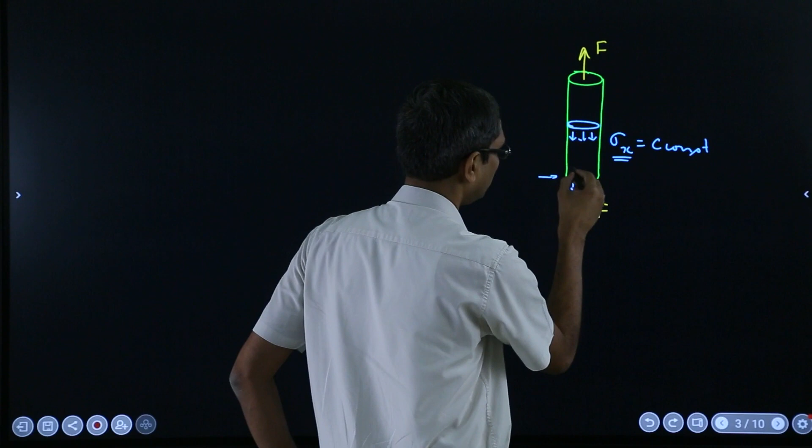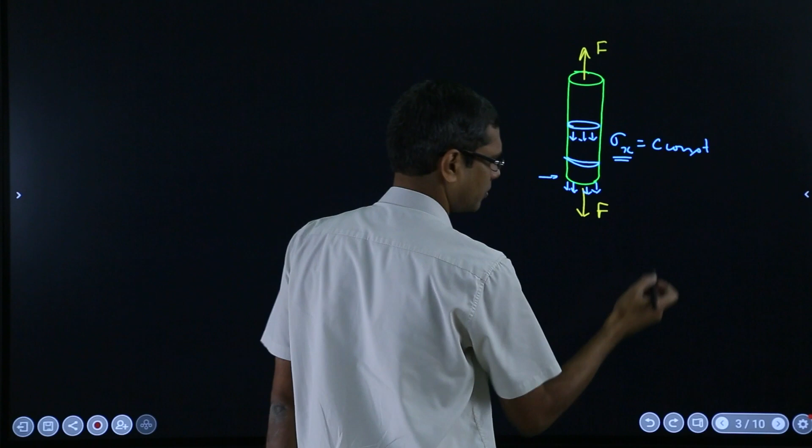So we imposed the condition that F should be applied as uniformly as possible over the cross section, so that we will have this condition as close to the end as possible. Otherwise, if we apply a concentrated force, the stresses will not be uniform here and they will gradually become uniform, and we have to be far away from both the ends to have these conditions of uniformity of the stress.

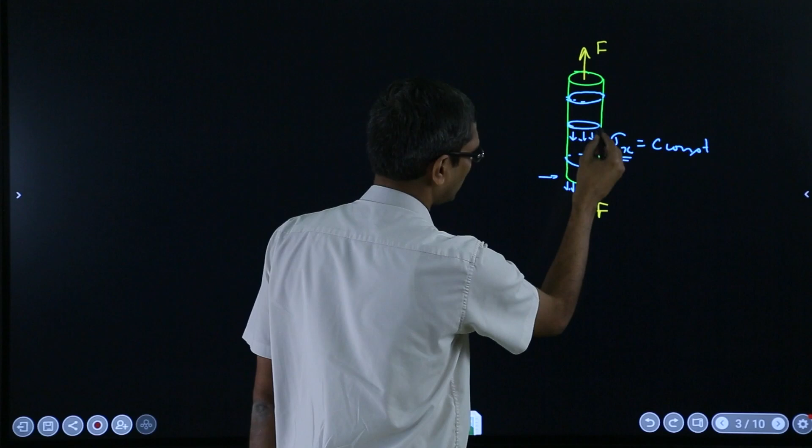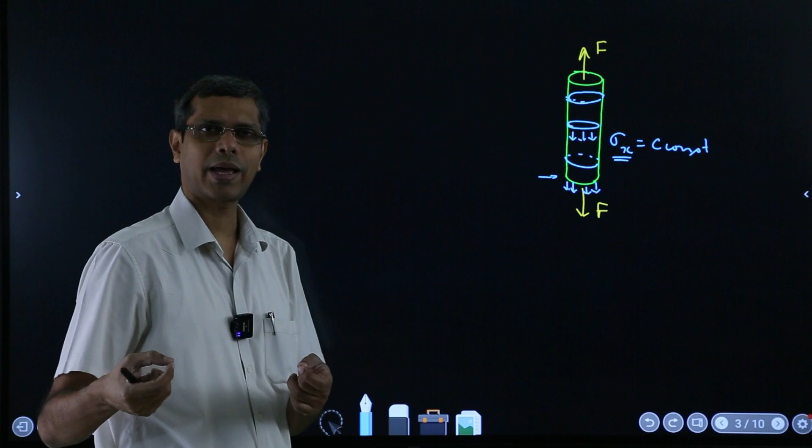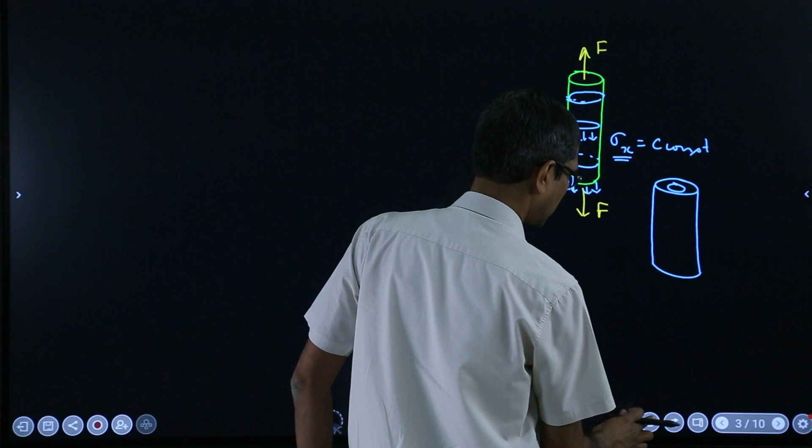And similarly, in the torsion case, we said that the shear stress distribution cannot even be assumed to be uniform, and we figured out that it varies from the center, where it is 0, to the maximum at the circumference. But there one more assumption was that our cross section must be an axisymmetric section, right. So the most general thing will be an annular cylinder.

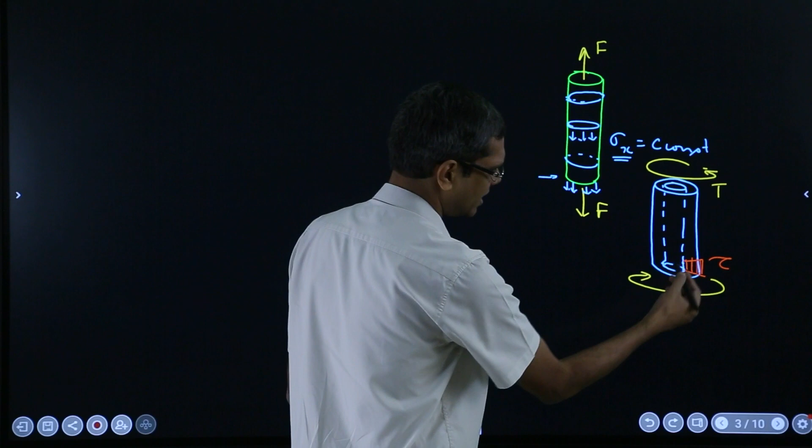So this is what we can get at max, and the torque obviously was acting like that, and the stresses were not uniform, but they were varying over this cross section. So they varied like that, the tau, the shear stress. And here also, if the forces causing this torque were uniformly distributed over all the area of cross section, this linear distribution will happen as close as possible to the ends.

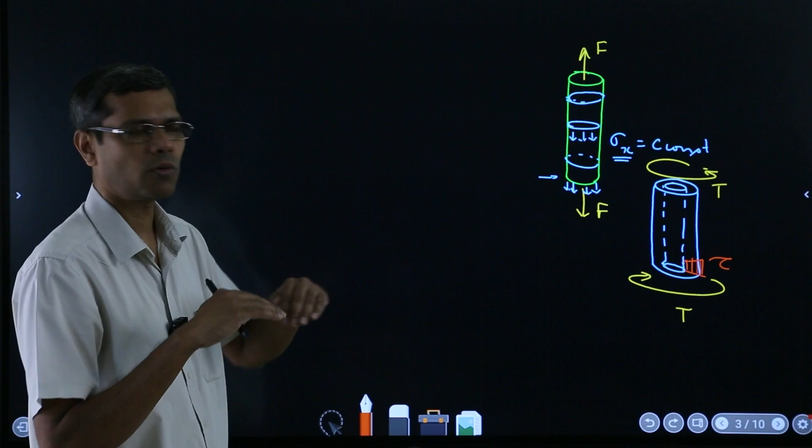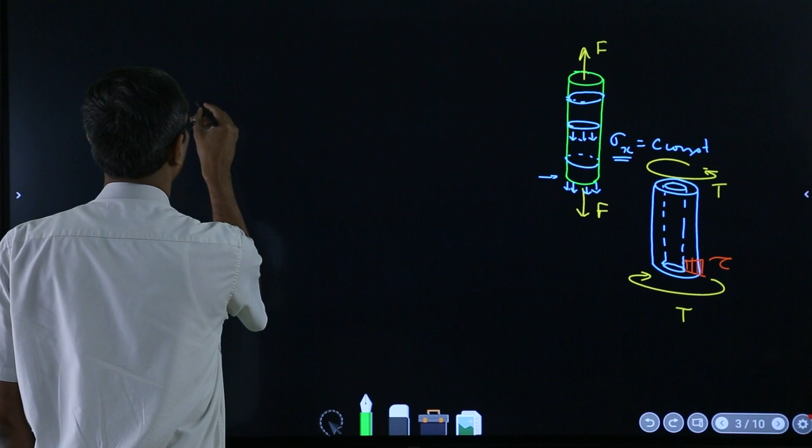So now, in comparison to that, we should discuss the cases for bending, so that it will be clear under what situation, what sort of conditions or assumptions are required to create a pure case of a particular loading. Now, in case of bending, you have the prismatic bar whose area of cross section should have a plane of symmetry like this, suppose.

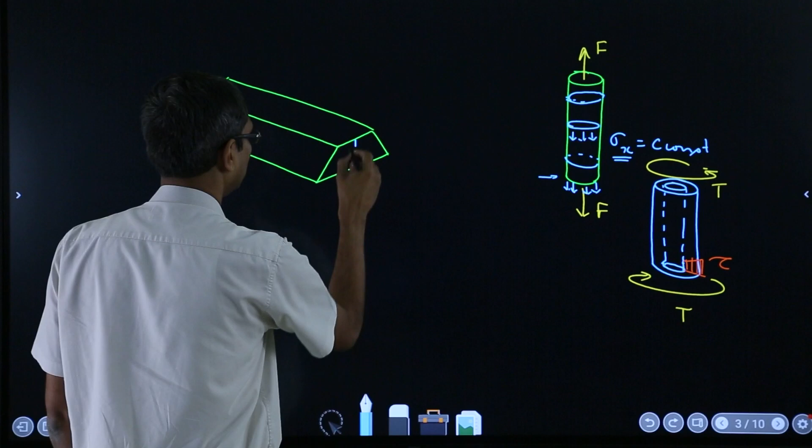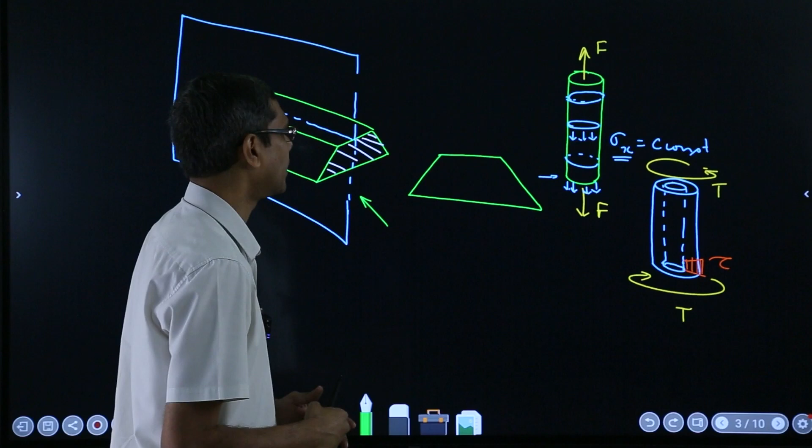And here what I have assumed, which is not very apparent in the drawing, is a plane which crosses this prismatic bar at the center, and this is the cross section of the bar. It's symmetric about this plane. So if I draw this view, it will look something like this. I'm drawing an isosceles trapezium; you can have a rectangle, you can have a square, which are special cases of this isosceles trapezium, and this plane of symmetry is somewhere here.

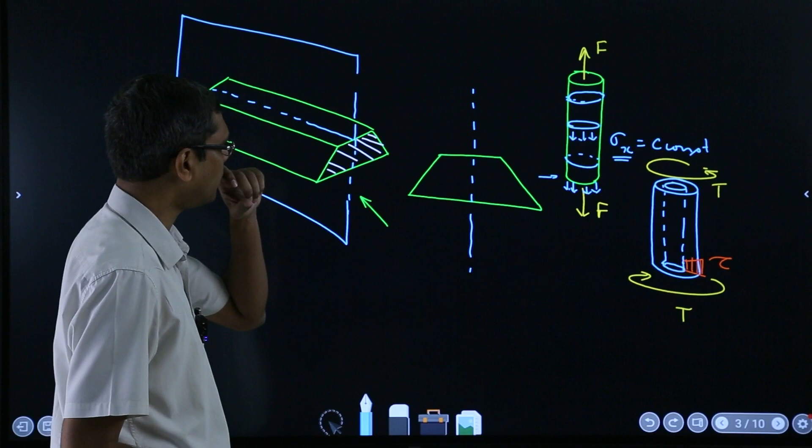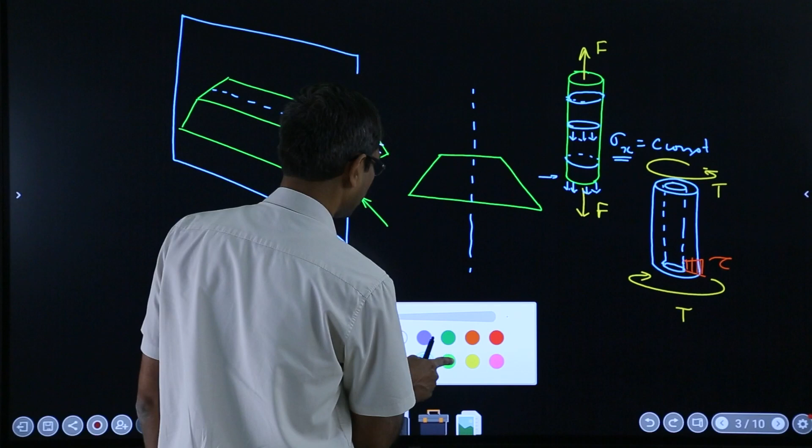So this is the first geometric requirement for a pure bending to prevail in a particular beam. So this was about the geometry. Now what about the loading? When I said that this is the most general, no, it's not the most general. A more general case could be even like this. It could be anything. This is a representative thing. Sorry for using that word. For example, I can choose one which is very common,

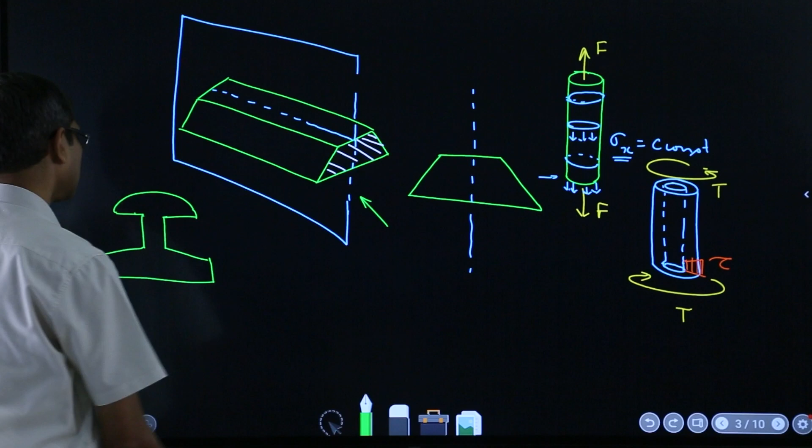like this. Now this is a cross section which has a clear symmetry about this plane. If you extrude this cross section throughout, again this is a case where you expect a pure bending to exist. So when I said that this is the most general, no, it is the easiest shape to draw, where we can show that the section has a symmetry about a plane and which is not a rectangle. Otherwise it can be any general shape.

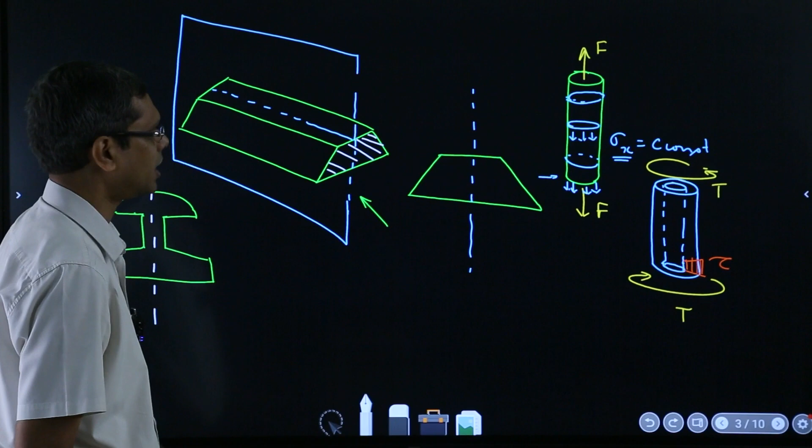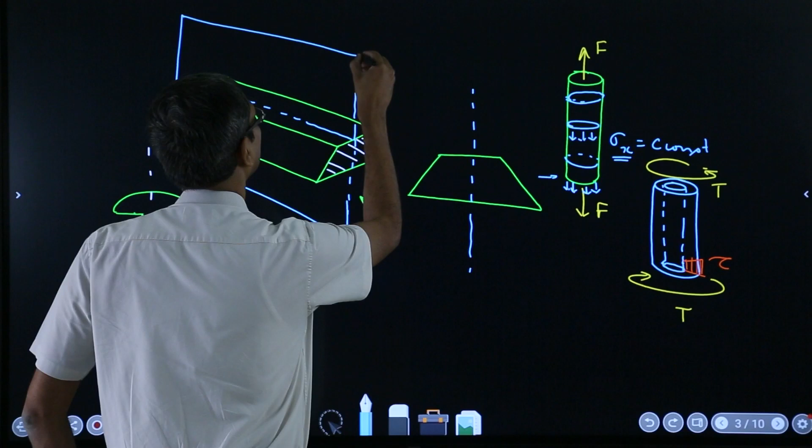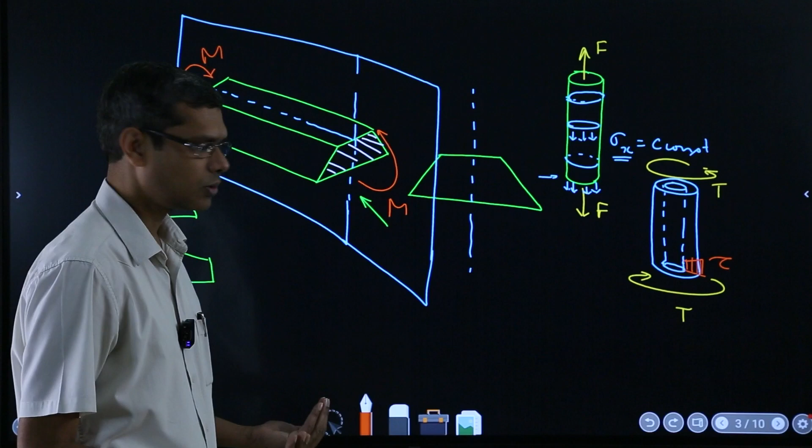And now about the loading, the moment which we are applying on this beam must exist on this plane only. That means I extend this plane, which is anyway an imaginary plane, there is no such physical plane existing, and then I should apply my moment on this plane. So the moments that I am applying exist on this blue colored plane. That's very important, because that means the loading also is symmetric with respect to this cross section.

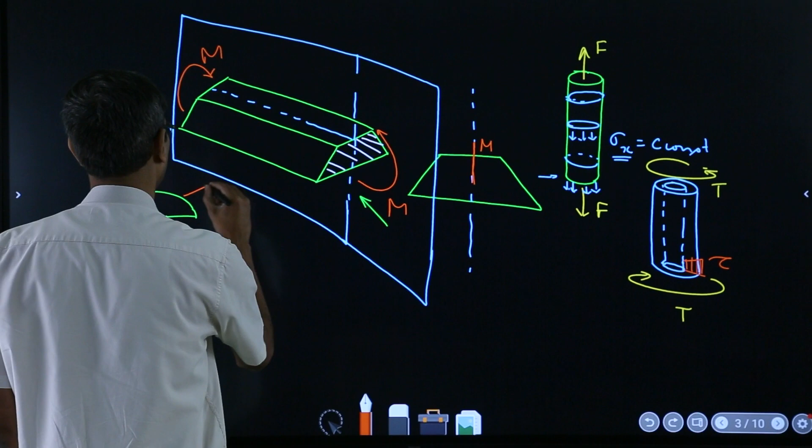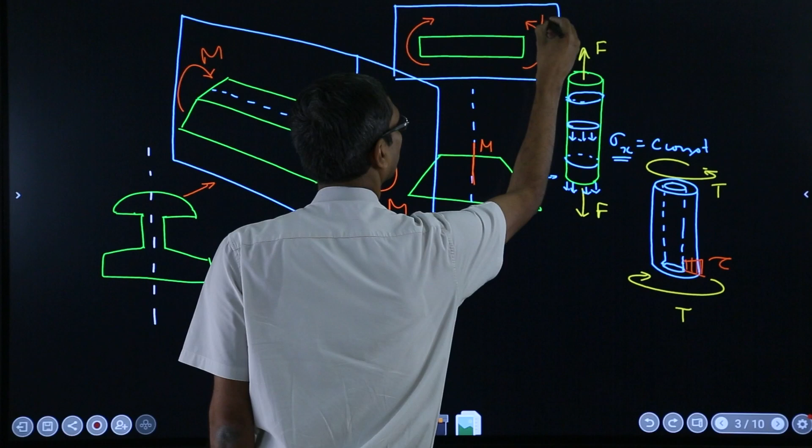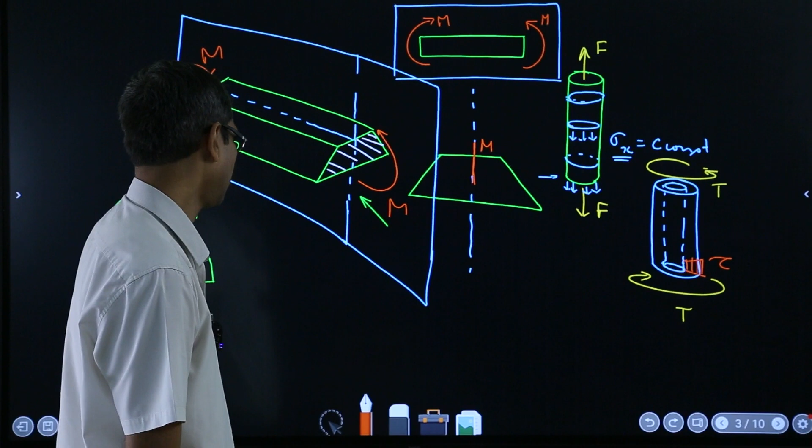That means these M's are acting here, on this plane. And I can draw one more picture looking from this side so that it will be clearer. This is the beam, and I'll draw this blue colored imaginary plane. This is not a physical plane, and the moment exists on this plane. This sense of the moment is conventionally taken to be positive. Now this is the assumption. Any more? I think that should be fine.

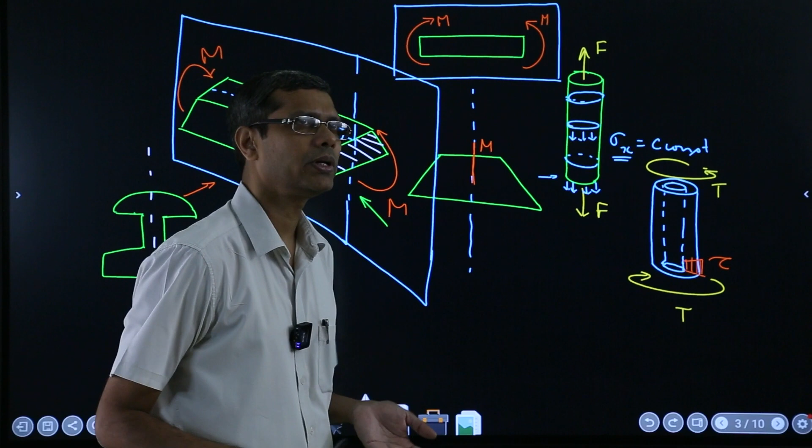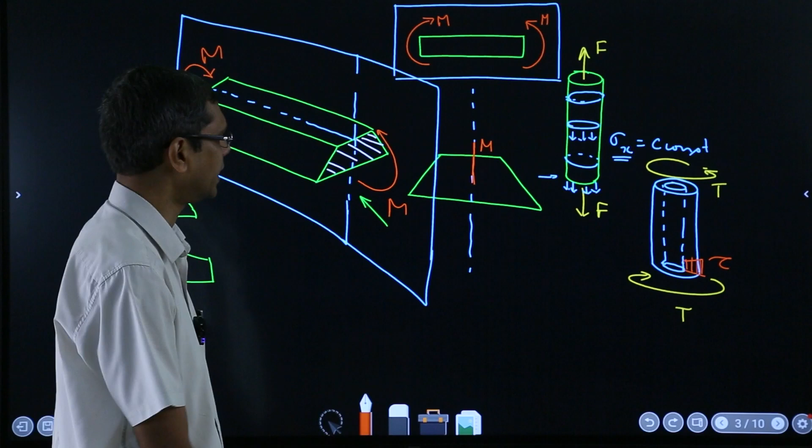So geometrically and load-wise, we have considered all the conditions or assumptions which are required to create a case of pure bending. Then I'll talk about the deformations which are caused by such a case of pure bending in the next segment. Okay.